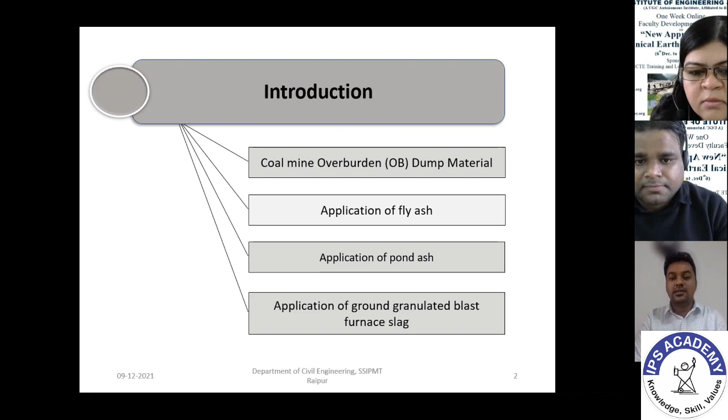As per the report of coal provisional statistics, Government of India, Ministry of Coal, during 2019, for the removal of 632 million ton from all the coal mines of India, they had to remove around 1,753 million meter cube of OB material. So where are we going to place this OB material? Basically there are two places we can dump this material. One is called internal dump: whenever we dump this material at the mine site, it is called backfill. Or if we dump this overburden material or mine spoil away from the mine site, it is called the external dump.

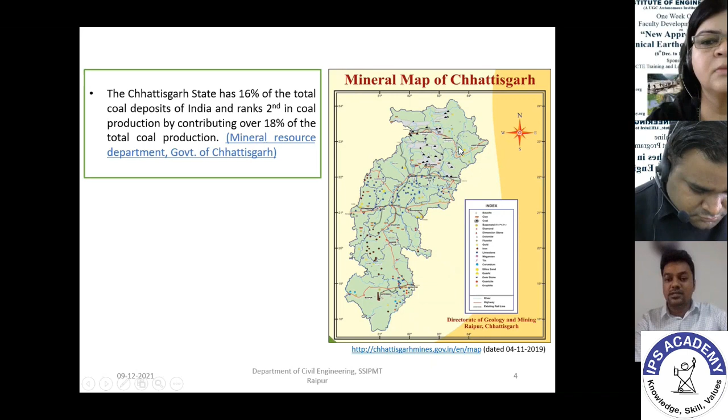So in all the cases, the stability of this dump has been a major concern over the years. As I am living in Chhattisgarh state, it has around 16% of the total coal deposit of India, and it ranks second in coal production by contributing around 18% of the total coal production all over India. These are the location map and the mineral map of Chhattisgarh. You can see that there are different regions of coal mines available in our state.

So there are several factors which basically affect the stability of this type of slope, or you can say the mine dump. There are some geological factors, meaning what foundation material is available there, what the lithological profile is, what the ground profile is, the soil formation, layering. These are the main factors which affect the stability. And the geometrical factors: you can clearly observe how the geometries are forming due to the dumping of this material, like dump height, like slope angle.

Another one is the physico-mechanical properties. This is one of the important parameters which actually affects the stability of the dump, because it provides the stability of the particular materials, like cohesion, angle of internal friction, and density. These are the three parameters which actually provide the shear strength parameters to the material.

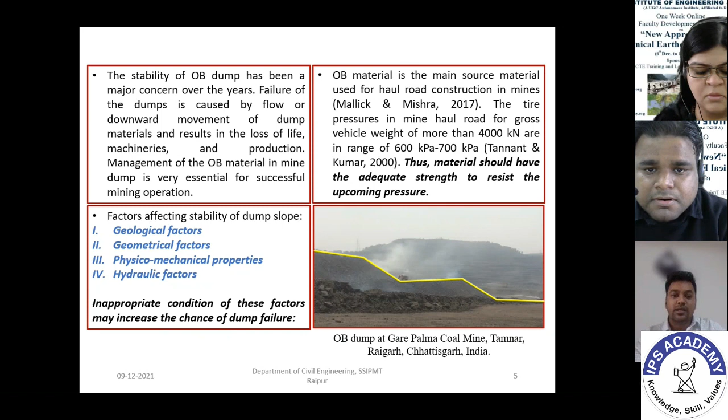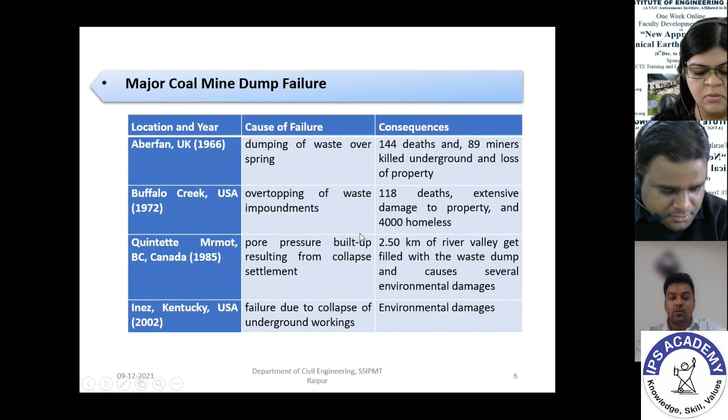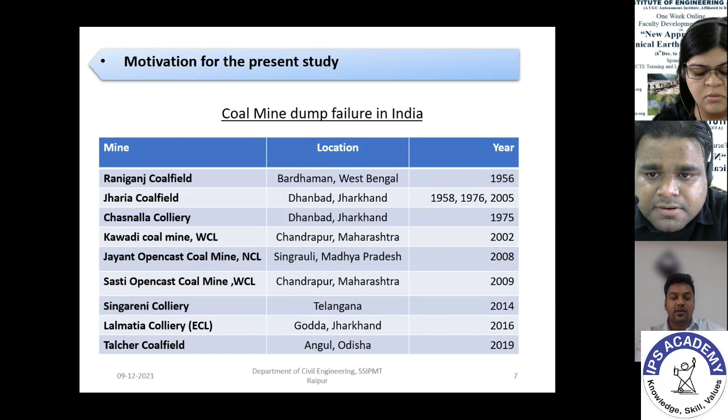So what are the motivations of the present study? During these mine dump failure cases, you can see several consequences due to the loss of lives. In 1966, 144 persons died, and after that in 1972 in the USA, around 118 people died due to the overtopping of waste impoundments. These are cases from outside India, but in India also, since 1956, dump failures have continuously been occurring at mine sites, causing loss of lives and machinery.

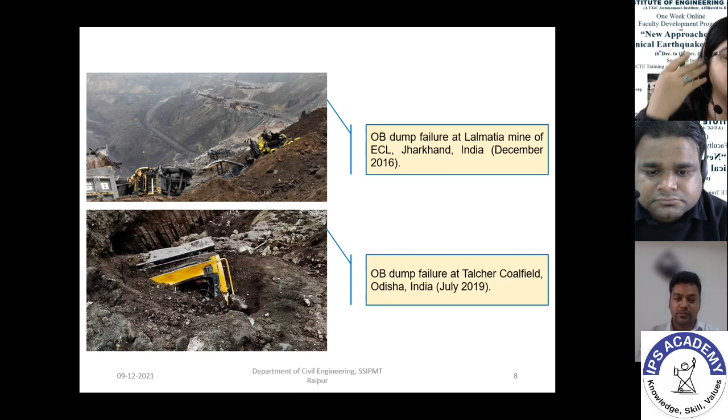From this figure you can see the first picture of the Lalmatia coal mine of Jharkhand, where due to the failure of this dump material, machinery and equipment were damaged, and some persons were also injured, or some deaths also occurred at this particular mine site. So these cases have to be investigated by geotechnical engineers, and appropriate solutions or remedial measures have to be given by all the engineers for the safety and proper running of the mine site.

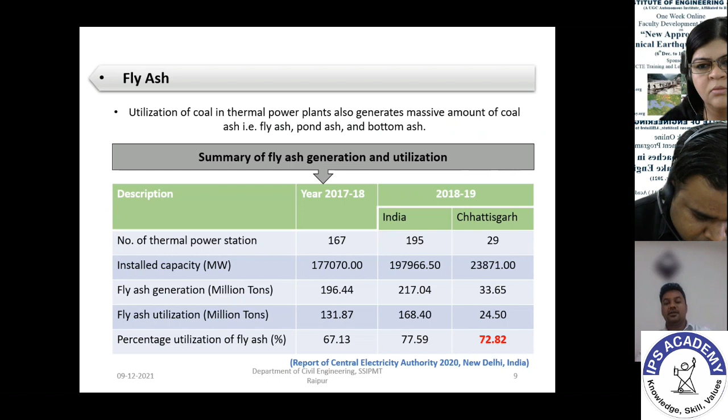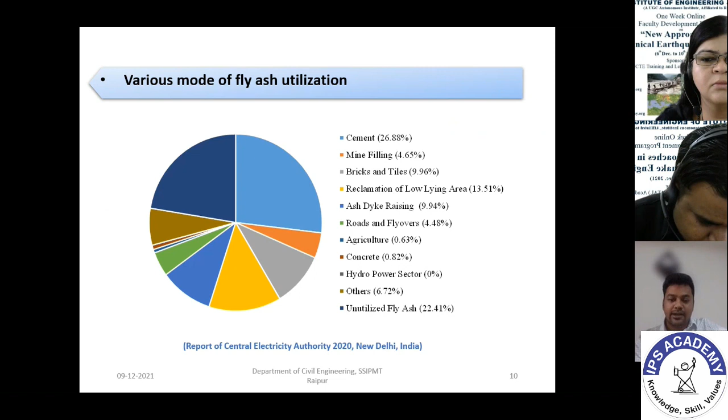So that's why we have gone for this particular problem: after the extraction of coal, we can also dump this fly ash and pond ash to get maximum utilization and achieve full 100% utilization of the fly ash. Along with that, GGBS, another industrial byproduct, is widely used for the production of cement, and as per the research conducted by Sharma and Sivapullaiah, the combination of fly ash and GGBS can be more beneficial than utilizing them alone.

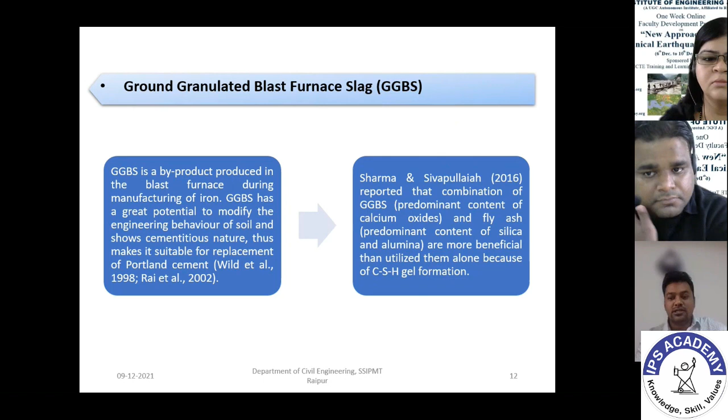So from all these studies and the particular field problem, we decided to incorporate industrial byproducts, that is fly ash, pond ash, GGBS, along with the OB material or mine spoil, to stabilize that slope, as well as for the construction of the mine haul road. This is the methodology we adopted: several laboratory investigations along with numerical modeling for the stability analysis of the mine dump. Based on the numerical modeling, we further suggested the optimum geometry, the dumping sequence, and the optimum amount of industrial byproducts, that is fly ash, pond ash, with or without GGBS, that we can incorporate in the field to get maximum utilization of the industrial byproducts.

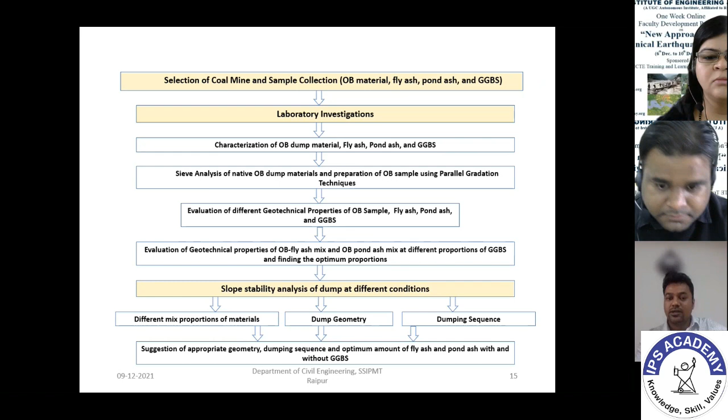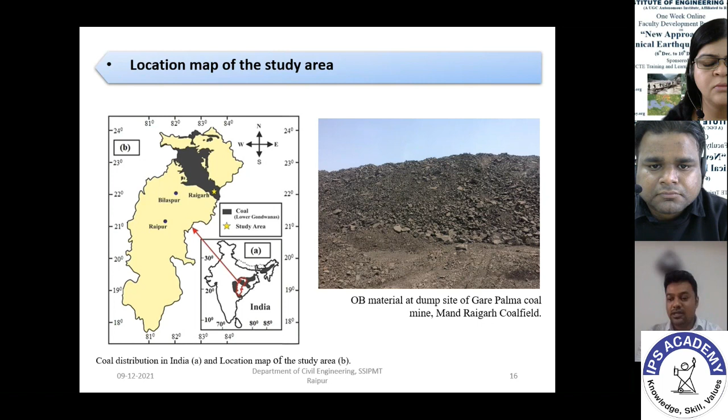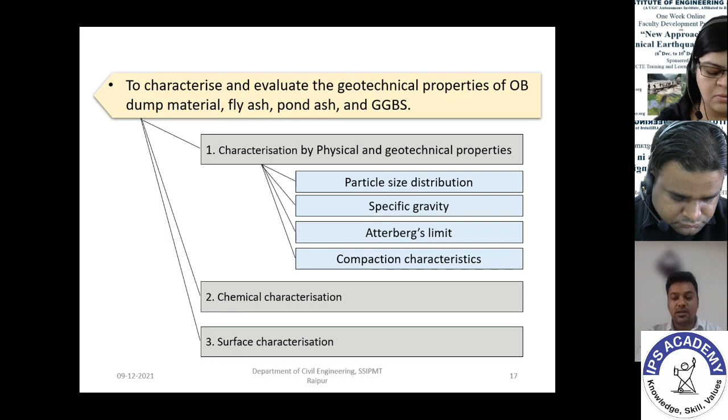So the proper investigation has to be carried out by considering the limitations of our equipment, and based on that we have gone for the characterization of the material. So basically we have characterized our material by physical or geotechnical properties, chemical characterization, that is, what elemental composition is present there, and the microstructural surface characterization that we have conducted. So these are the referred codes for the experiments.

And moving to the particle size distribution, it is the most important, because the particle size of the actual OB material was ranging from fine grained soil to around 80 mm, and we don't have that much laboratory equipment to determine the geotechnical properties of that material. So how can we reduce that particle size? There is one technique called the parallel gradation technique, proposed by Lowe in 1964, that is used to reduce the particle size and closely replicate the properties of the material, that is cohesion and angle of internal friction, with the available laboratory equipment.

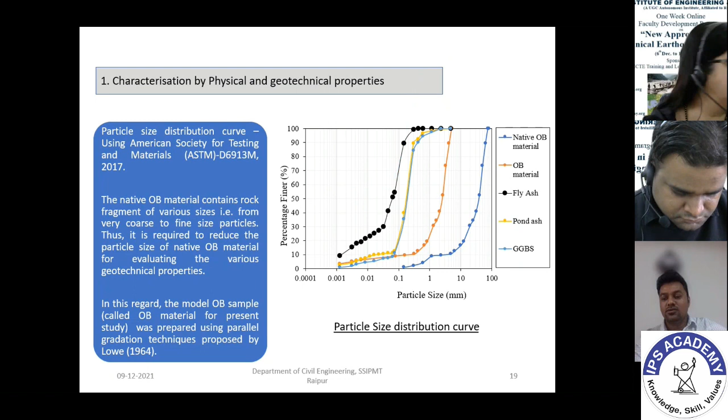So we have adopted that technique and prepared one model sample by reducing the particle size, but in that case the coefficient of uniformity and coefficient of curvature, that is Cu and Cc, should remain the same as the native material. These are the gradations of the model sample, and we are going to determine all the geotechnical properties based on this material, which is close to our actual or native material. Fly ash is finer than the OB material or the model sample. Then pond ash and GGBS, it is close to the pond ash gradation. These are the particle size distribution curves of all the materials.

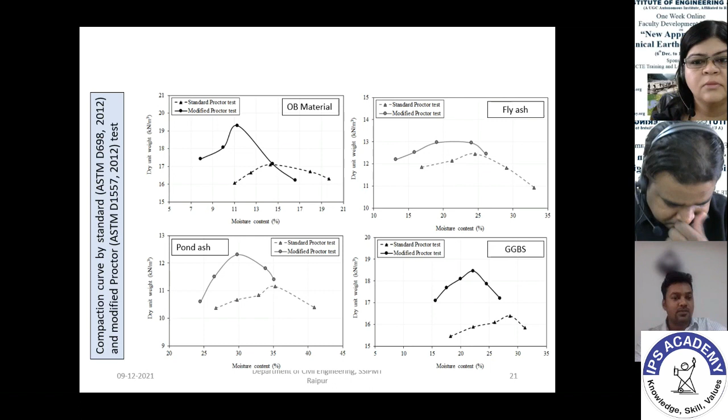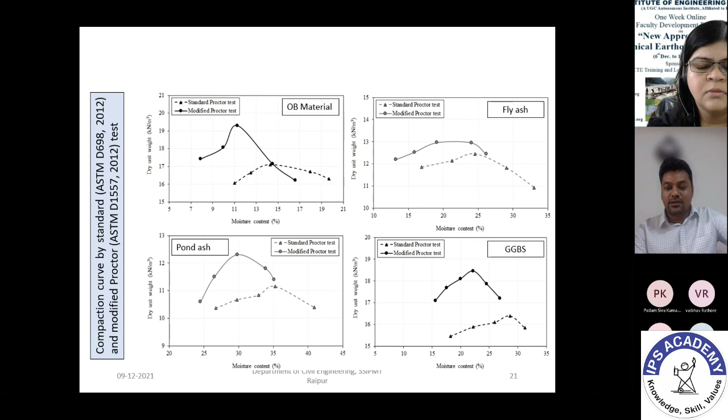And this is the compaction characteristics. From this figure you can clearly observe that the maximum density we are getting in the case of mine spoil, because it consists of rock fragments also, but fly ash and pond ash have the least maximum dry unit weight or dry density, and it has some significance because of the lower unit weight. If you dump the material in the embankment, you will get the minimum stresses induced due to the self weight. So these are the basic important properties which are going to be beneficial when we incorporate fly ash and pond ash with OB material. And GGBS we are getting around 18.5 kilonewton per meter cube of density. So these are the overall geotechnical properties of all the materials.

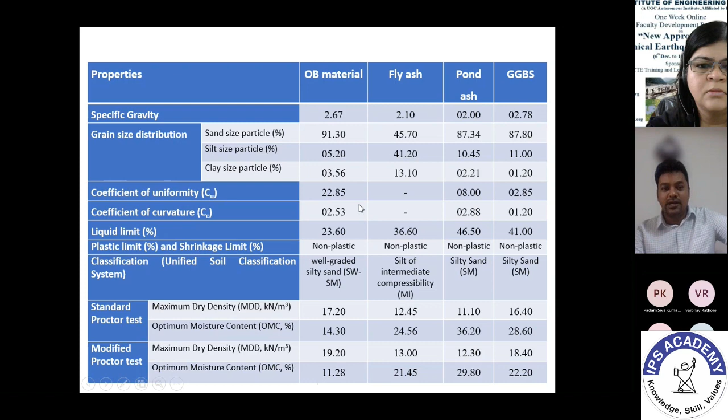Moving to the gradation curve, we are getting that the OB material is well graded silty sand, and fly ash is a finer particle. It is coming under silt of intermediate compressibility, and pond ash and GGBS are coming under silty sand as per the USCS classification. And from this you are getting a very high Cu value because we prepared this model sample as per the native material, and these are the overall properties we have achieved from the materials.

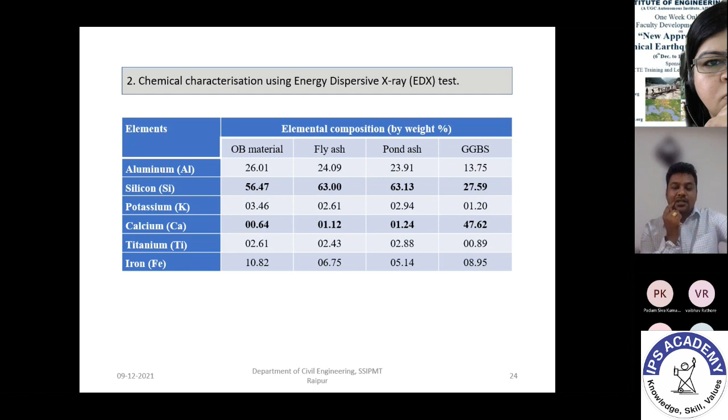Now the second one is chemical characterization using the EDX test. These are the elemental composition results. From this figure you can clearly observe that GGBS has a predominant content of calcium, and in the case of fly ash, OB material and pond ash, you can see that silicon is predominant. And as per the report of Sharma and Sivapullaiah, the combination of GGBS along with fly ash or pond ash can be more beneficial than utilizing them alone. So based on that we have prepared these combinations to conduct the experiment.

Now the third one is surface characterization. As you all have conducted several tests on concrete, fly ash is used to increase the workability because of its spherical shape. From this figure you can clearly observe the spherical shape in the case of fly ash, and irregular shapes are observed in the case of OB material and GGBS. It also provides the maximum resistance during penetration in the CBR test, as you can observe.

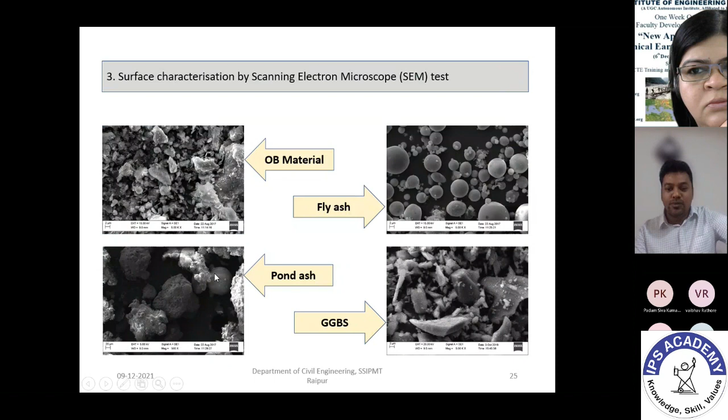In the pond ash, you know it is a combination of bottom ash and fly ash in the form of slurry. Here you can see some hollow structures are also available, and some spherical shapes are also present in the pond ash, which gives the true picture of spherical shape surface characterization by SEM test.

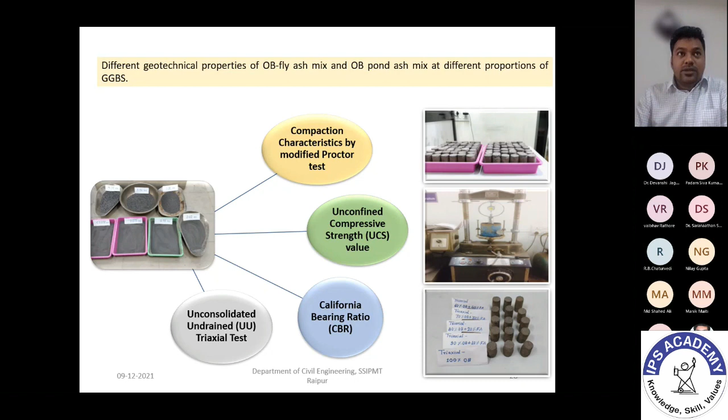These are the samples we prepared by mixing different combinations, considering the lower and upper limits from several literatures. We prepared around 34 or 35 samples, and different tests were conducted. These are basic tests, but as we are adding GGBS, we are getting a cementitious matrix in the material, so we also conducted tests at some curing periods. The basic CBR test was conducted under 4 days of curing, but we also did it after certain soaking periods, like moist curing, and this is how we conducted several tests on the material.

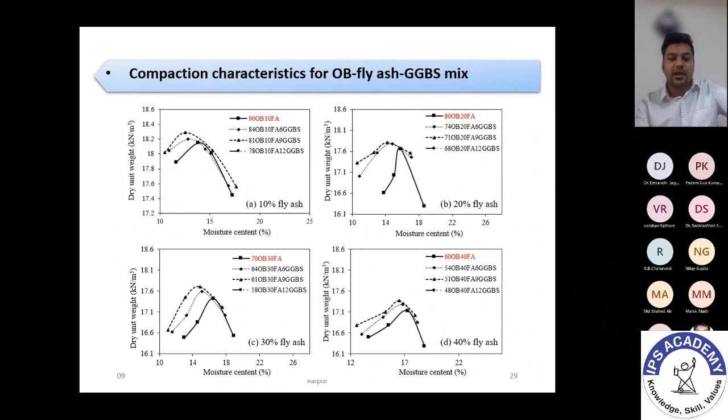Now moving to the compaction characteristics of the material. Here you can see that with the addition of 10% fly ash, it is coming around 18.2. However, with further addition of GGBS, you can see the curve trends left and upward. That means the dry density is increasing with the addition of GGBS at 6, 9 and 12%, and we are getting lower moisture content. A similar trend was also observed when OB material was added with pond ash and GGBS.

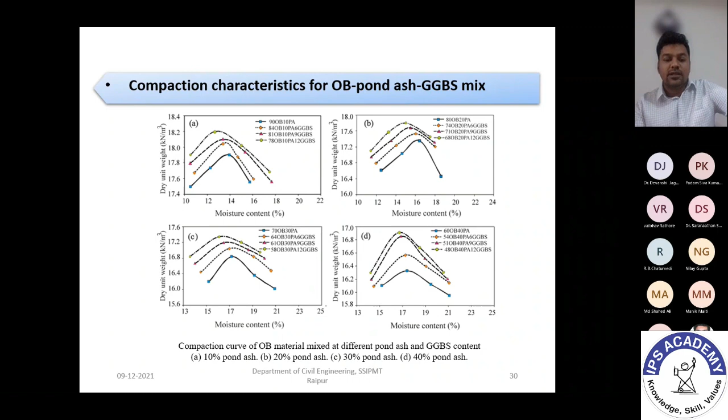These are the overall characteristics of dry density and optimum moisture content that we obtained with the addition of fly ash and pond ash along with GGBS, in case of mine spoil.

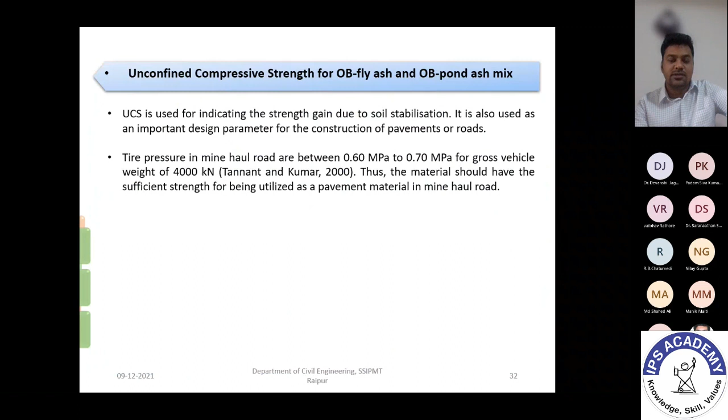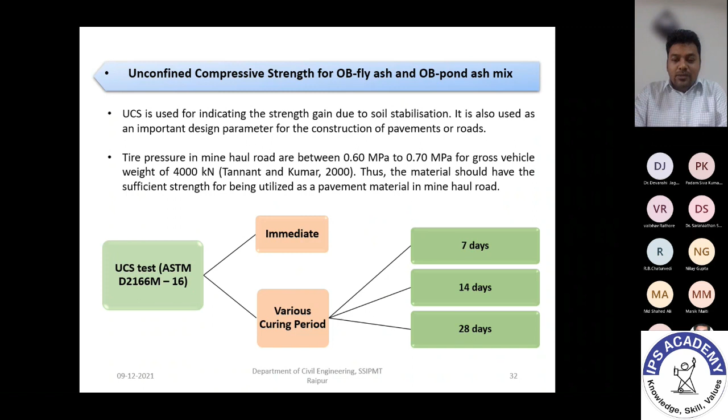Further, UCS test has also been conducted on the OB-fly ash mix and OB-pond ash mix without addition of GGBS, because for construction of mine haul roads, as per the report of Tannant and Kumar, the material should have a capacity of 0.6 to 0.7 MPa for a gross vehicle weight of 4000 kilonewtons. So we conducted this test under various curing periods also, like 7, 14 and 28 days.

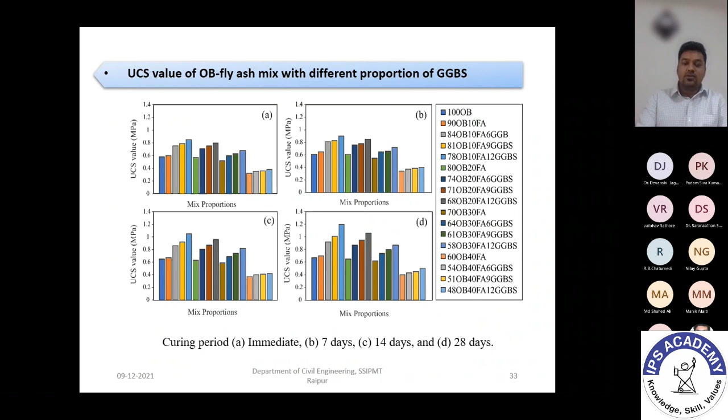Now, how these variations are affected by the variation of fly ash - we can see that once we added 10% fly ash, the value shifts in the upward direction. That means initially, this finer particle - the OB material comprises of sandy soil, like some sand type of material - but if you add fly ash, it helps fill the gaps or voids present in this particular mine soil, and that's why we are getting a higher amount of UCS.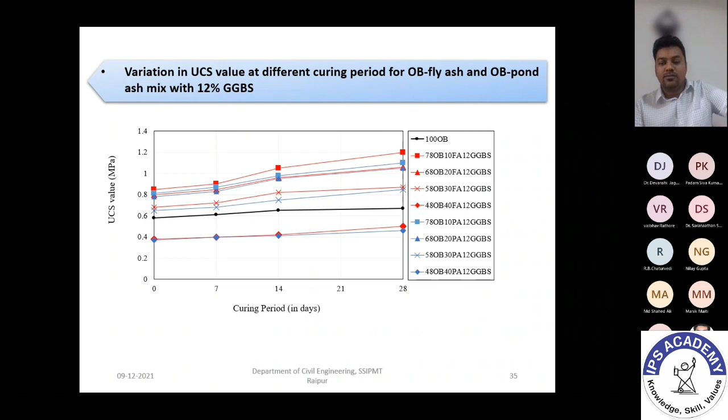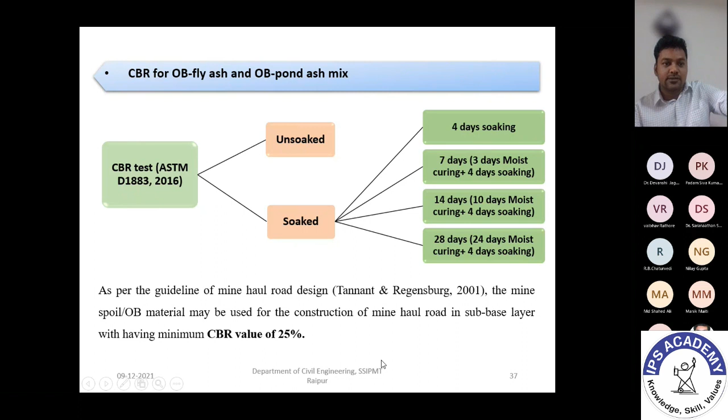Now the CBR test was also conducted with the soak period - normal 4 days soaking as per standard code - and further we went for 7, 14 and 28 days curing, in which the 4 days soaking period was constant, but the initial days were considered as moist curing. During this period we conducted this test, and for mine haul road construction it was given in the guideline of mine haul road design that it should have a CBR value of at least 25%. So the test was conducted.

So these are the variations of CBR at different curing periods for OB-fly ash and OB-pond ash mixed with 12% GGBS. We are only indicating the 12% GGBS case here.

We are getting the maximum value because of that. These are the variations as we further increase the fly ash content from 10 to 40%, and we are getting a reduction in CBR value.

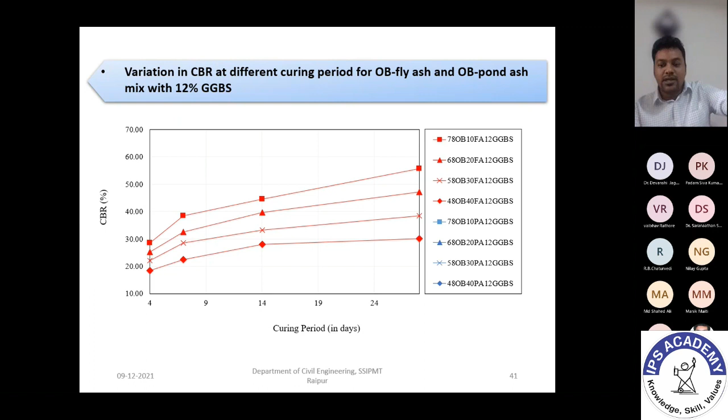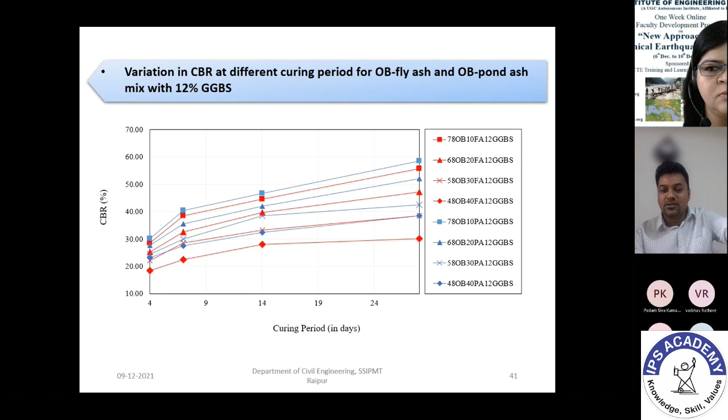But as compared to fly ash, the pond ash has more frictional resistance. You all are aware that pond ash gives a higher frictional value, phi value, as compared to fly ash. This value gets increased and we are getting slightly higher value as compared to fly ash in case of pond ash. So these are the tests for UCS and CBR.

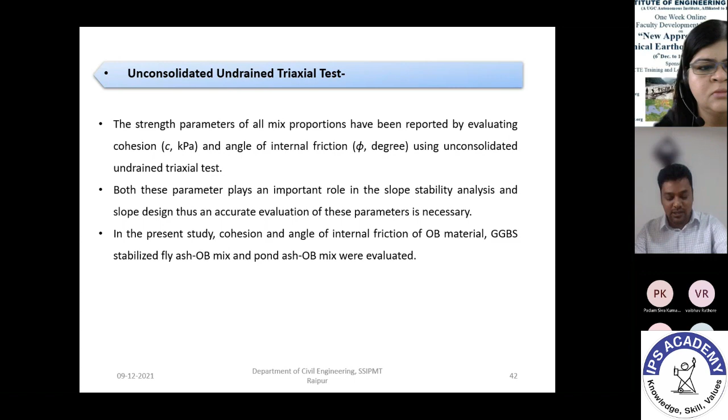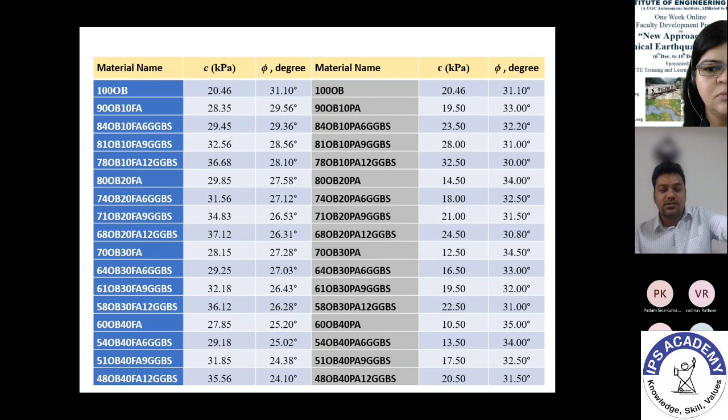Further, we have determined the cohesion and angle of internal friction, which is required for numerical modeling. All the tests were conducted to determine the shear strength parameters. So all these variations were reported here, for all the mixed proportions, showing the cohesion and angle of internal friction values we are getting.

These variations can be clearly observed in this figure. For the native material, the cohesion value is around 20.46 kPa, and the angle of internal friction is 31.10 degrees. These are the variations with fly ash and pond ash, in combination with cohesion and angle of internal friction values, varying with GGBS content.

Once we added 10% fly ash, the value of cohesion increased. Similar to the variation in UCS value, the C value also followed a similar trend. We are getting a slightly higher value, around 28.35 kPa, and this trend increased further with addition of GGBS at 6, 9, 12%.

Once we added 20% fly ash, we got a slightly higher value, but with further addition of fly ash beyond that, the value got reduced.

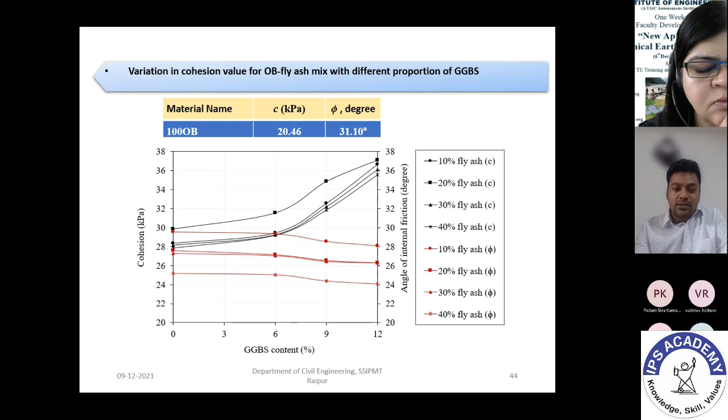And what about phi, the angle of internal friction value? The values we are getting are low as compared to the native OB material. That's why it gets reduced with the addition of fly ash, and this trend continues with further addition of fly ash. But some variation occurs in pond ash, which doesn't follow the same trend.

Once we added 10% pond ash, due to its non-cohesive nature, we get some reduction in cohesion value, and this trend continues with further addition of pond ash.

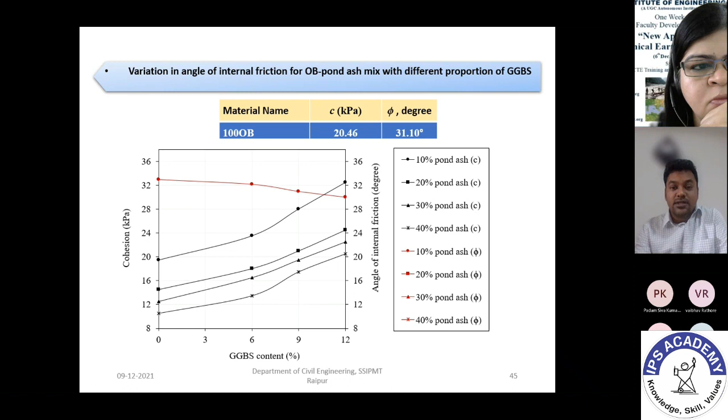Once we added pond ash, what is the variation in angle of internal friction? Because pond ash has more frictional resistance as compared to OB material, the value increases, but with addition of GGBS we get a slight reduction. So the trend follows an increasing value with the addition of pond ash.

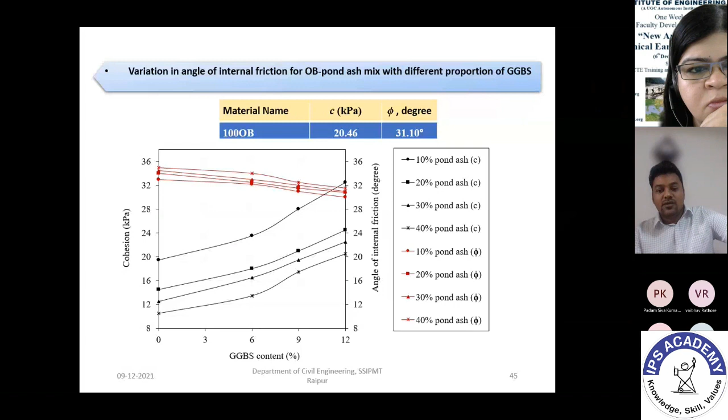So these are the overall variations of cohesion and angle of internal friction value with addition of fly ash and pond ash along with GGBS.

These are the overall summary, because in a single figure we cannot understand all the variations for all the parameters, but I have presented the overall summary here: addition of GGBS in OB-fly ash causes an increase in MDD, but once we add fly ash and pond ash, we get a reduction in dry density, which is very important in the case of numerical modeling.

The mixed proportion containing 20% fly ash and 30% pond ash with 12% GGBS shows adequate CBR or UCS value, the resistance value. We are getting adequate values, and that combination can be used for preparation of material in the subbase layer for construction of mine haul roads.

So whatever construction we go for the road, we can use this for the subbase layer. The increase of fly ash content in OB material causes an increase in cohesion and decrease in angle of internal friction. However, in case of pond ash, we get a reduction in cohesion but an increase in angle of internal friction. These are the two parameters that vary due to addition of fly ash and pond ash.

Both are actually obtained from the thermal power plant as industrial byproducts, but when added to the mine soil, we get somewhat varied material behavior. The addition of GGBS in OB-fly ash or OB-pond ash mix causes an increase in cohesion and a decrease in angle of internal friction value.

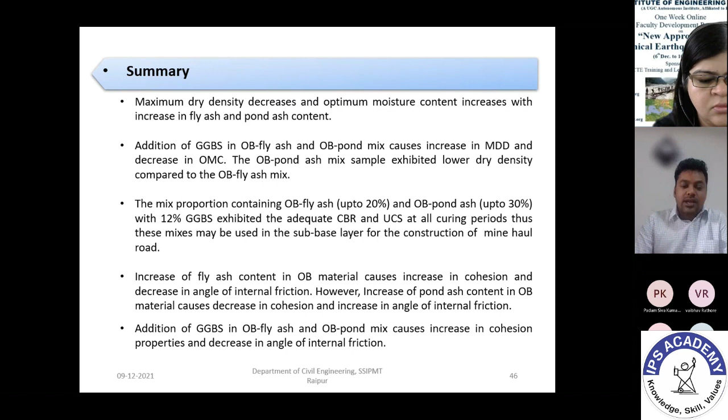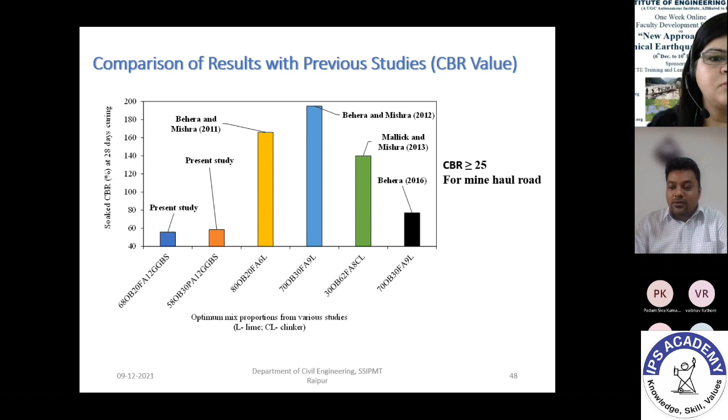Again, for the CBR value comparisons, we are getting this proportion—mixed proportions can be used for the mine haul road design. So these are our comparisons of results with the previous studies.

After getting all the results, after determining some basic parameters, we have to incorporate it into the numerical modeling for suggesting the optimum geometrical configuration of the mine dump. We have seen in the first few slides how the geometries are forming due to the dumping of material, and how we can optimize the geometry to get the maximum dump capacity—meaning we can dump the maximum material at that particular location with higher safety.

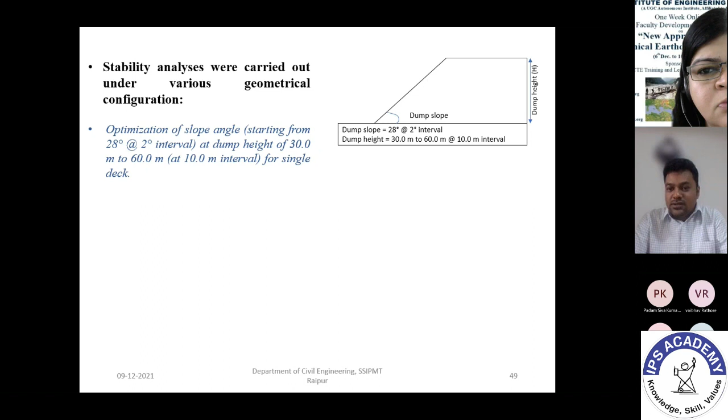These are the combinations as per the guideline of the Directorate General of Mines Safety, where the slope angle should be varied from 28 degrees, and based on that analysis we can get the optimum dump geometry. The dump height has been varied from 30 to 60 meters at 10-meter intervals, and based on that we have suggested the optimum geometry.

Further, we considered another sequence—whether we should dump the native OB material from the toe level or the stabilized material from the toe level. These are the two variations of dumping sequence we conducted to achieve the height of 30 to 60 meters.

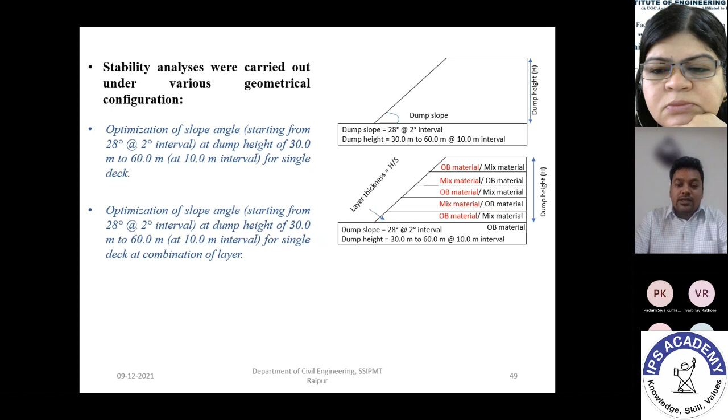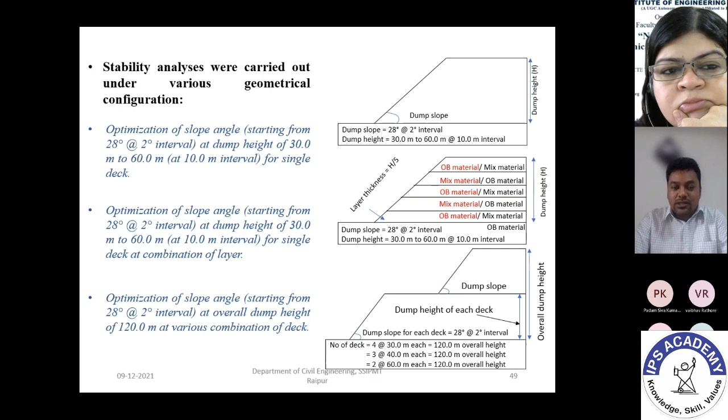At the particular Raigarh mine where we collected samples, the ultimate depth of mine was 120 meters. So we also designed our dumping profile for the overall height of 120 meters, considering a number of combinations of decks, like benching, which we will show in the next slide.

These material models were assigned and the geometries were varied to suggest the optimum dump profile. Through this numerical modeling we determined the factor of safety, and based on the critical limiting value of 1.30, we suggested our optimum geometry for the various combinations of mixed proportions.

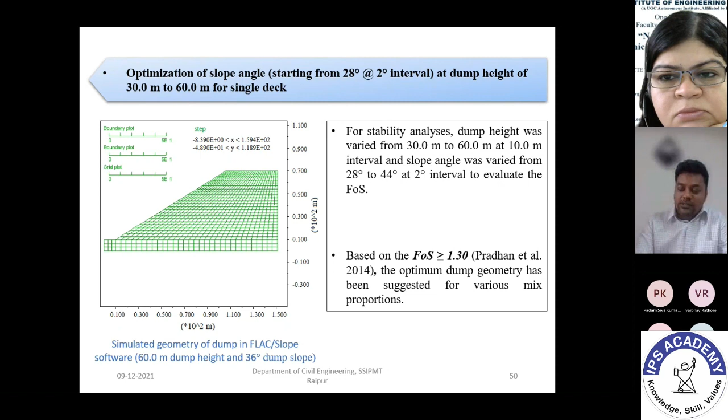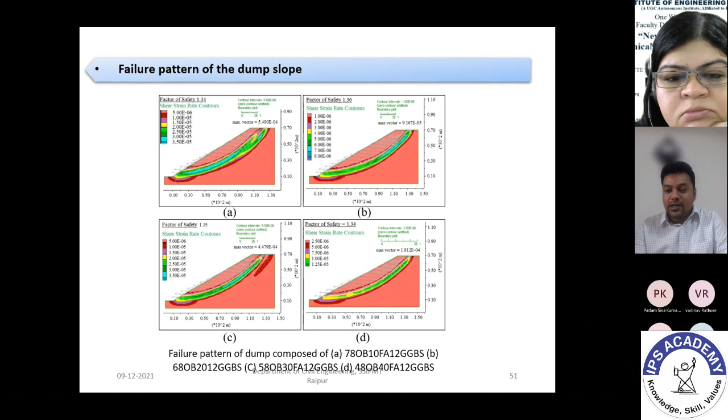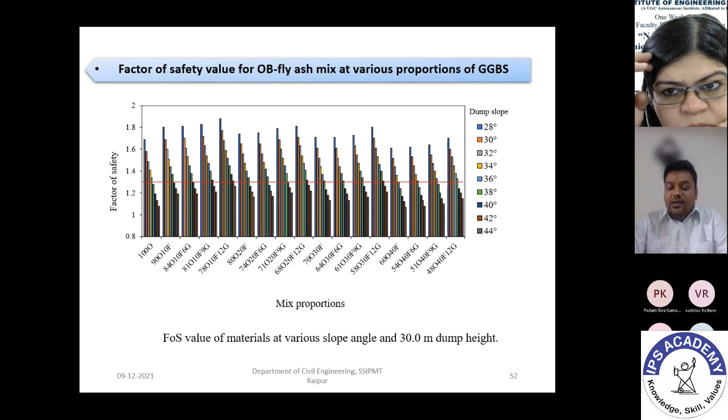These are the variations of factor of safety. This horizontal line indicates the limiting value, or the minimum required factor of safety of 1.30, for the mine site. Based on that, whatever material lies above this critical line can be suggested as the mixed proportion for the dump.

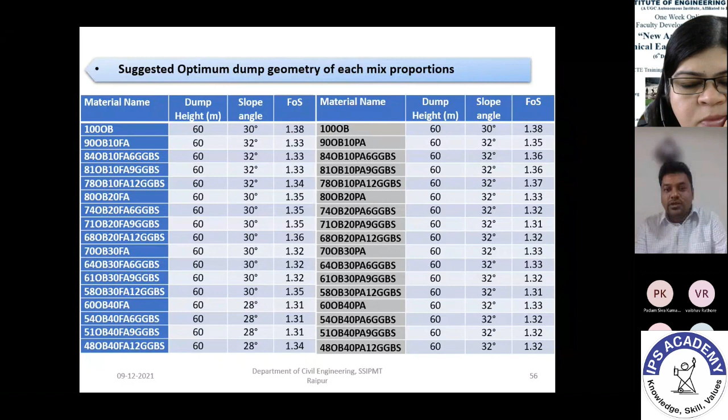After getting the factor of safety, we suggested the optimum dump geometry for mixed proportions. So here is a basic summary: initially, if we go for the native OB material, or 100% OB material, the optimum dump slope we are getting is around 30 degrees for a 60-meter dump height.

Once we added 30% fly ash utilization—a very bulk quantity available at that mine site—we get the same profile. But if we add pond ash up to 40%, with or without addition of GGBS, we get a slight increase in dump slope, which helps to increase the dump capacity. We can dump more material at the same site.

We also considered the dumping sequence—whether we should dump the native OB material first or the fly ash first.

These are the combinations considered for the dumping of material at the particular mine site, for a particular layer thickness of h by 5, where h is the actual height of the dump, ranging from 30 to 60 meters, and based on that we decided our layer thickness.

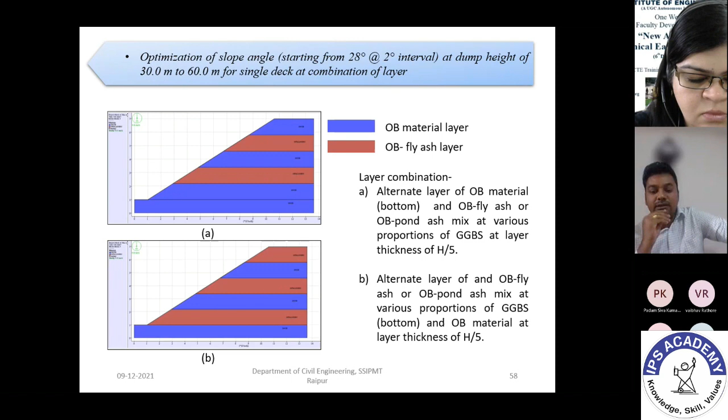So based on that, again we have suggested the optimum dump geometry. From this figure you can see that for all the cases we are getting the same dump profile. Because of mixing of material and layering of the native material, we are not getting that much increase in the optimum dump slope. But here we can say that we can utilize up to 30% fly ash in that particular dump, because we can get the maximum capacity of fly ash at a particular location.

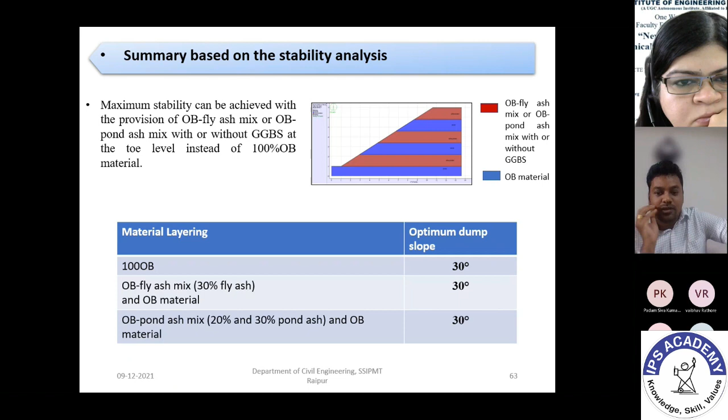And also in the case of pond ash, we can also utilize up to 30% pond ash at the same dump with the same dump profile as the OB material. And

Hello, yes, hello sir. Yes, sir. You are audible now. Sorry, the light got disconnected. It's okay, sir. It is visible, ma'am. Slides are visible. Yes, sir. Slides are visible, sir.

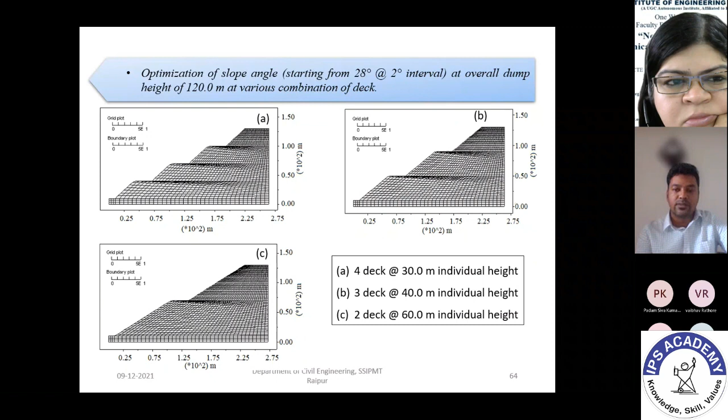Now the overall dump height was the ultimate depth of the mine site, and it was around 120 meters. We have considered several benchings of the particular dump: in the first case it was 4 decks of 30 meter individual height, 3 decks of 40 meters, and 2 decks of 60 meters. These are the combinations we have considered. We have proposed for the particular location of the dump site that we can bench to get further higher safety. So these are the overall optimum geometries.

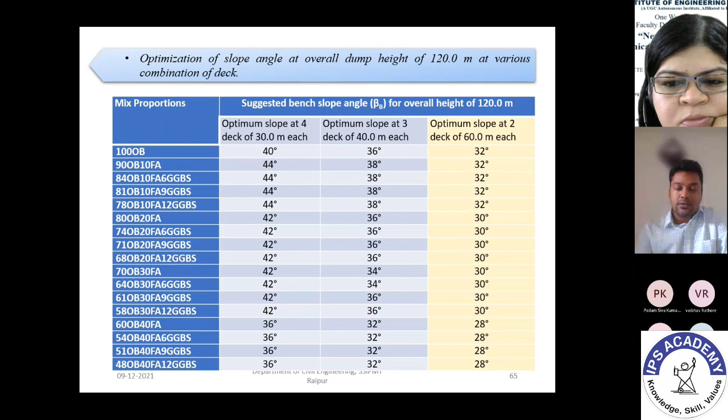But you can see here, earlier we were getting around 30 to 32°, but in this case for the overall height of 120 meters, for 4 decks of 30 meters each, we are getting around 40°. So this much capacity we can achieve for the particular cases of the material with the benching technique. So these are the variations we are getting on the stability analysis and the optimum profile, for OB material 2 decks of 60 meters each.

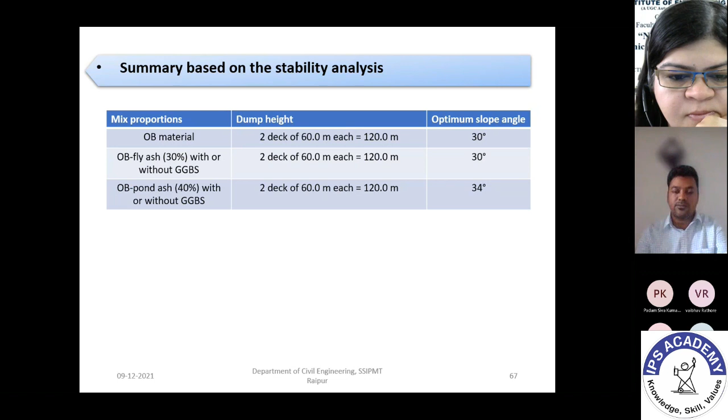Earlier we were discussing 4 decks of 30 meters each, but for maximum capacity we should go for the minimum number of benches, and for 2 decks of 60 meters each we are getting 30 degrees. Again for 30% fly ash it is 30 degrees, but with 40% pond ash we are getting around 34 degrees. Why are we getting this increase in optimum dump slope with the addition of pond ash? It is because pond ash has the least unit weight and higher frictional resistance. These two values are actually beneficial for increasing the factor of safety of the dump profile.

So, as per the utilization of industrial byproducts, that is fly ash, pond ash, and GGBS, as per our current study for the mine site of Gare Palma coal mine, Chhattisgarh, we have found that in the mine haul road we can utilize 70 million tons of fly ash. For pond ash, we can go for 105.6 million tons, and in the case of the mine dump, for fly ash we can go for 105 million tons of utilization, and for pond ash we can utilize 140 million tons at the particular location of Gare Palma coal mine that we have studied.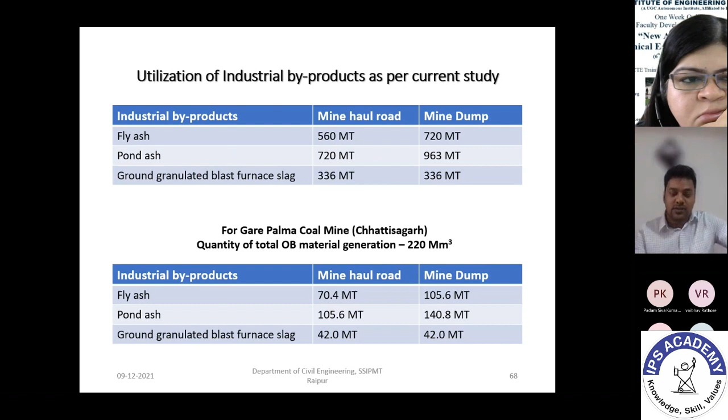So the total quantity of OB material generation was 220 million cubic meters at that particular coal site, where we can utilize this much of our industrial byproducts. These are the findings of our research as per the previously suggested geometry.

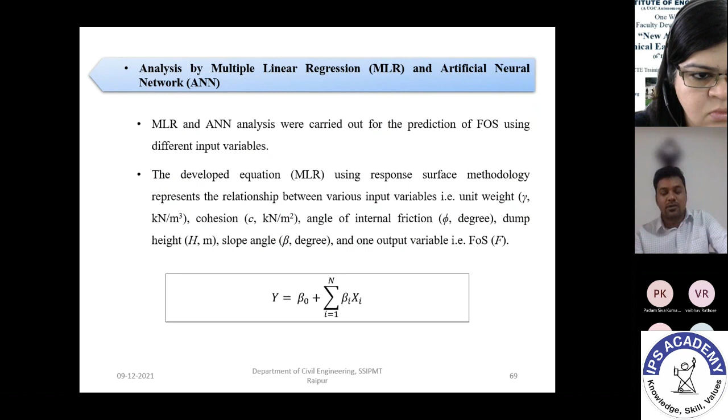And further, since not everyone has the software for numerical modeling, we have suggested multiple linear regression as well as artificial neural network modeling, and we have got one linear equation. It is linear, but we are getting very good regression statistics for the equation. We have run 950 data sets to develop these equations, and we have validated the equation with the remaining 20% of data, and the R square value is 95.07%.

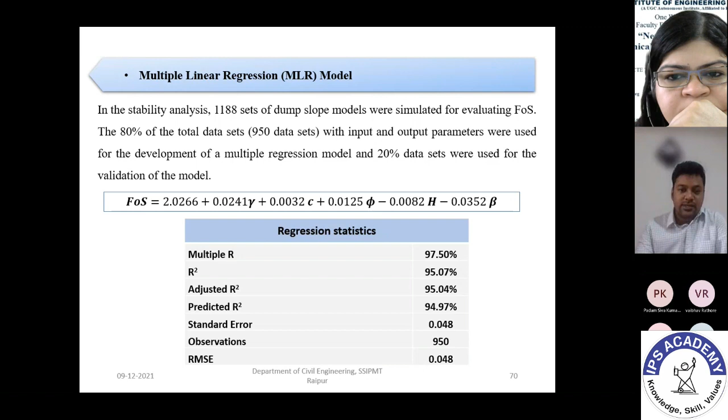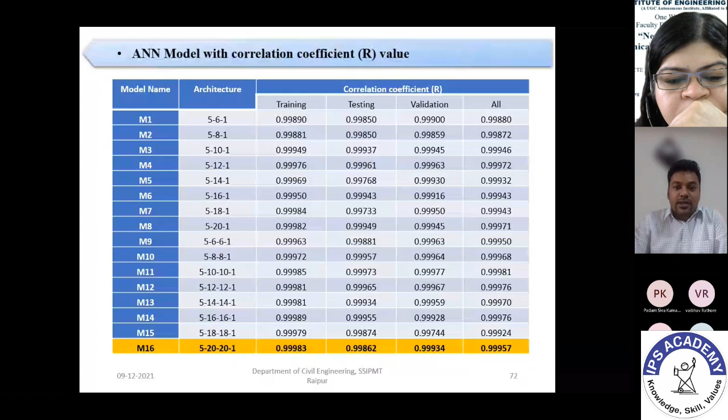Also, after developing our equation we have compared it with other researchers. Sakellariou in 2005 also proposed an equation to determine the factor of safety based on several input parameters. We have considered the 5 basic input parameters, and based on that we have predicted the factor of safety using our model, and we are getting around 94% R square.

However, for Kostic et al., we are getting a low prediction value because they also incorporated the pore water pressure ratio, RU, in their equations. That is why, by putting that value to 0, we are getting a somewhat lower value of R square.

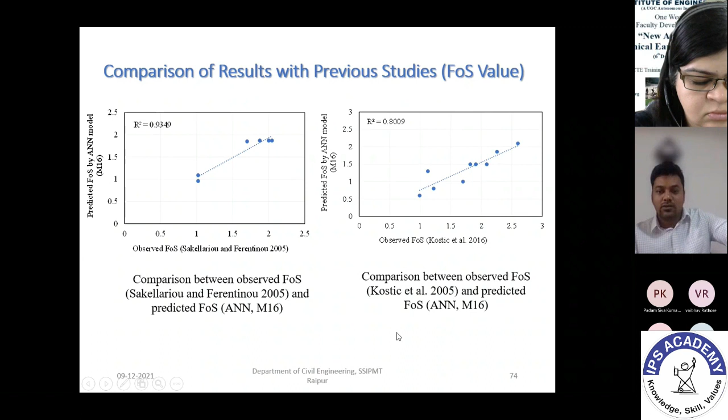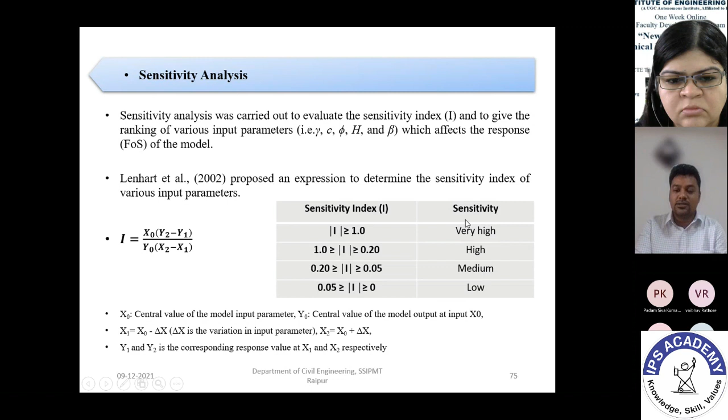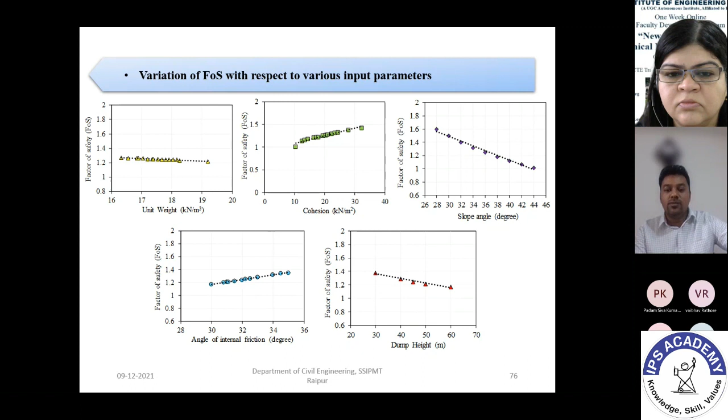So another analysis, that is sensitivity analysis, we have carried out to evaluate the sensitivity index and to get the ranking of various input parameters, that is, which are the most sensitive or responsible parameters that affect the factor of safety or the stability of the coal mine dump. So Lenhart et al. have proposed an equation. There are several sensitivity analysis techniques available, but this is one of the simplest methods, proposed by Lenhart et al., to determine the sensitivity index, and there is a sensitivity remark available based on this value. For that we considered all the 5 input parameters and conducted the sensitivity analysis, and then we got the variations of factor of safety with respect to various input parameters and determined the sensitivity index I value.

From this chart you can clearly see that the slope angle is the most sensitive parameter, and this sensitivity is very high, coming around 1.04. However, with respect to the other four parameters, you can see that all four also come under the high ranking. So whatever five parameters we have considered in our study, we can see that they come under the sensitivity of high to very high.

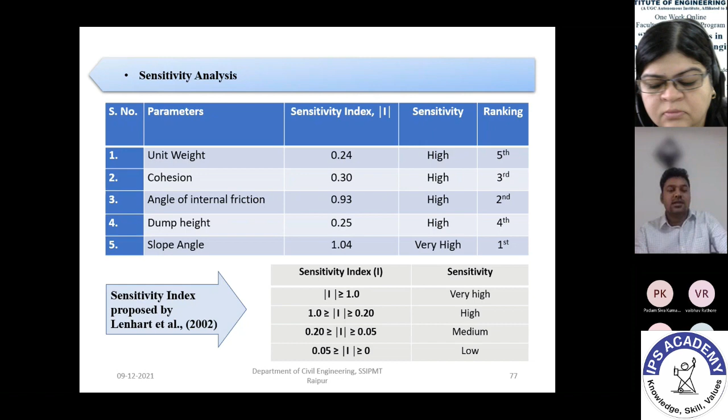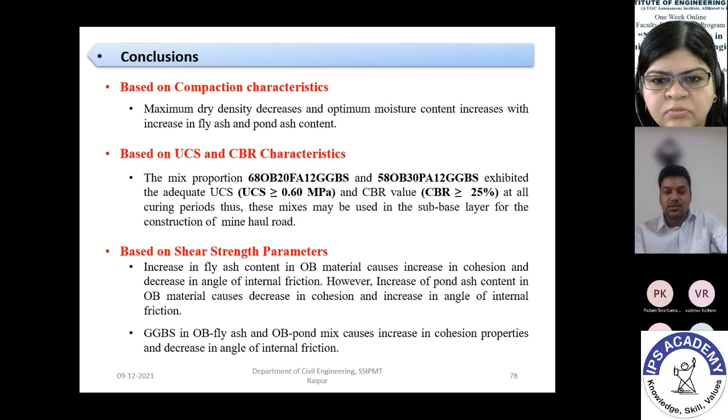So these are the overall conclusions that we have got from our study. Based on the UCS and CBR characteristics for haul road construction, these are the two mix proportions, that is, the material mixed with 20% fly ash and 12% GGBS, or in case of pond ash you can utilize up to 30% for the construction of haul road. Based on the shear strength parameters and optimum geometry for the single deck, like for 60-meter height, we can go up to a 30-degree slope angle for utilization of 30% or 40% pond ash with or without addition of GGBS. Or for the multiple deck at an overall height of 120 meters, we can go up to 30-degree or 34-degree in case of pond ash for two decks of 60 meters each.

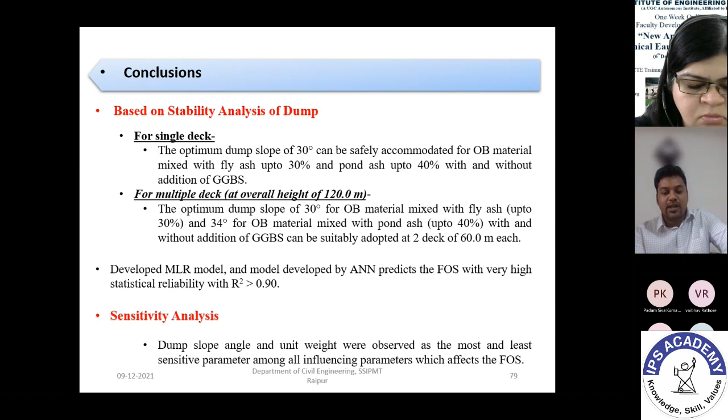And all the models were predicting the factor of safety with high statistical reliability, with R square greater than 0.90, and the sensitivity analysis also showed that the slope angle is the most sensitive parameter, all remaining parameters also come under high sensitivity, and amongst them unit weight is the least sensitive parameter.

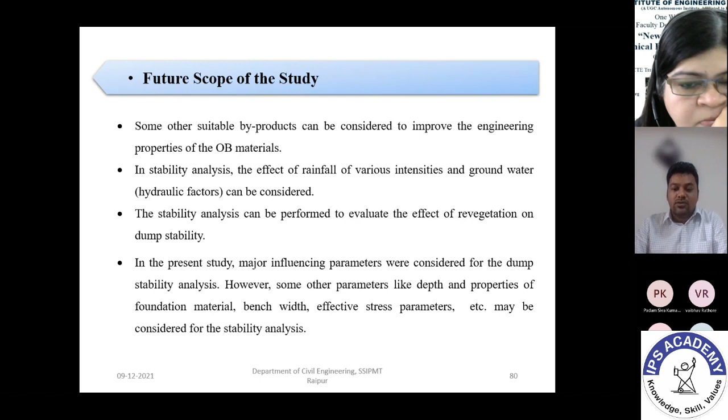So some research work we can also perform in this category by considering the hydraulic factors, that is, we can simulate the rainfall at a particular mine site. We are now working on how we can simulate the rainfall on a particular dump site and determine the factor of safety or the stability. We can also perform this analysis under seismic loading conditions, and some parameters that we have omitted from the present study, that is foundation materials, bench width, effective stress parameters. These other parameters can also be considered, and we can get a clear picture about the stability of the mine dump or the mine site, and how it is affected by the variation of these parameters.